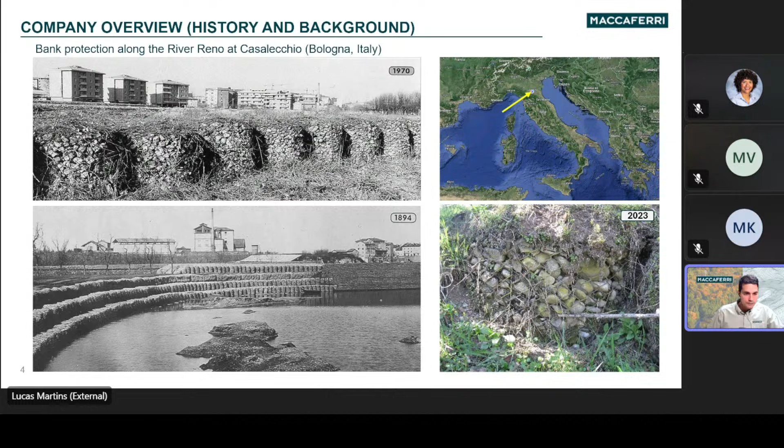First, for those not familiar with Maccaferri, Maccaferri started 130 years ago in Italy by the river Reno with the first ever gabion application. It was a river failure causing major flood, so they built a weir with gabions. Since then, they developed multiple other applications and improved their systems, the biggest improvement being the double twist wire mesh. That's what Maccaferri is known for in gabions, erosion control, and rockfall protection.

The double twist was very revolutionary because by introducing that second twist, it creates redundancy on those connections, so it creates a non-raveling pattern on the mesh. This is still the pattern that Maccaferri uses across all the sectors they apply it in. Maccaferri is present in multiple different sectors like MSE walls, gabion walls, and erosion control, but the focus today will be on rockfall draperies - simple and pin draperies.

This is an introduction to the Macro Design software, a free web-based design software developed by Maccaferri. It includes tools for simple drapery, called Macro 2, and tools for pin drapery, called Macro 1. It allows engineers to evaluate, configure, and optimize rockfall protection systems with standardized methodologies. Again, it's free software available online—you just access the website and use it.

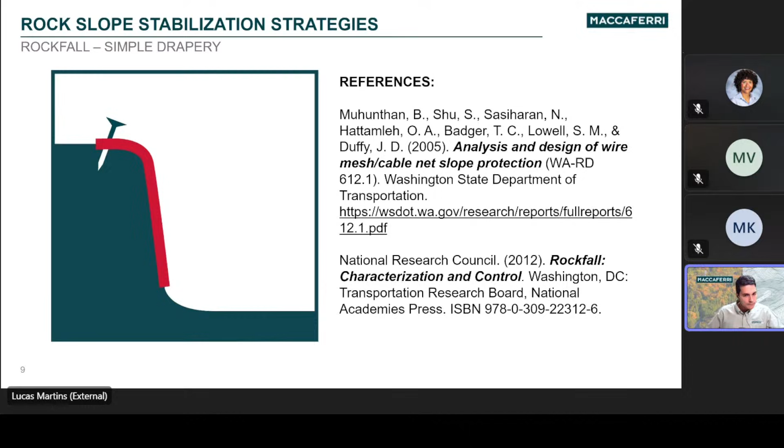First, we have the Analysis and Design of Wire Mesh Cable Net Slope Protection, a paper developed by the Washington State Department of Transportation—a very thorough paper on designing simple draperies. Second, we have the book Rockfall Characterization and Control, which also covers a lot of the simple drapery design.

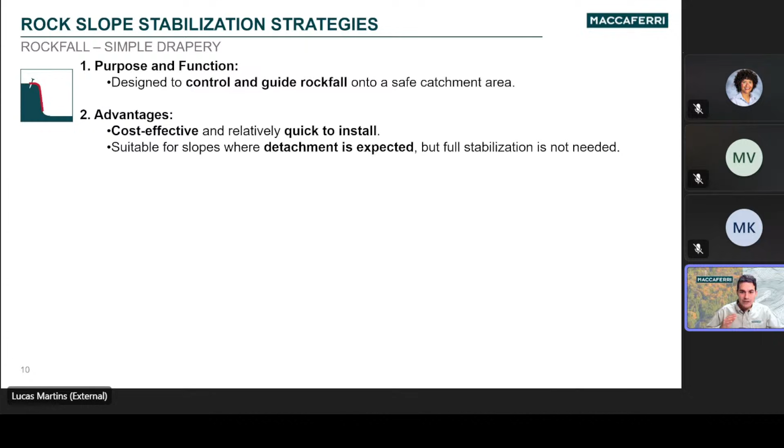So what is it? Simple drapery is designed to control and guide rockfall into a safe catchment area. It doesn't stop the rocks where they detach, it simply manages that fall path. One of the key advantages of this system is that it's cost-effective and relatively quick to install. It is suitable for slopes where we expect rock detachment, but there's no need for full stabilization of the slope—in other words, the slope doesn't require reinforcement, just containment.

From a design standpoint, there are a few key points to keep in mind. First, the drapery must extend above the rock source, so it actually captures the material. The anchor spacing and layout is also critical because besides maintaining the alignment of the mesh, it determines the performance of the drapery. Remember that the mesh carries its load mainly in the longitudinal direction, up and down, which makes the mesh tensile strength one of the most important specifications.

Finally, the mesh unit weight plays a significant role in dampening rock movement. A heavier mesh will push back that rock with a higher load.

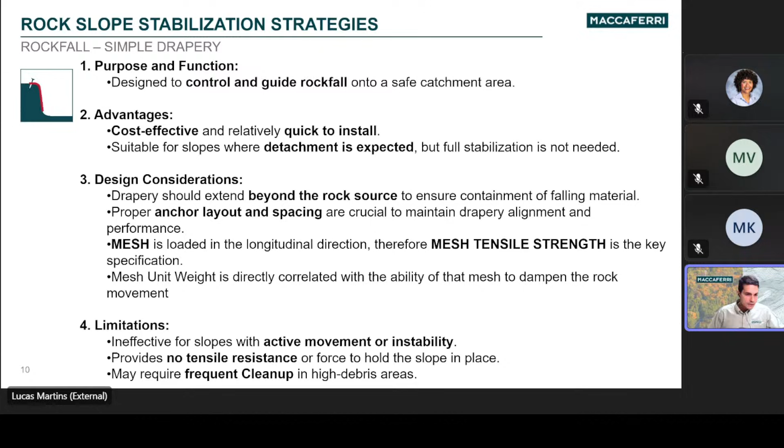There are also limitations to this system. A simple drapery is not suitable for actively moving or unstable slopes. It provides no tensile resistance or structural support on that slope. In areas where a lot of loose material is expected, it may require frequent cleanup to keep the catchment functioning properly. With this introduction in mind, let's move into how the system is modeled.

Here you can see the overall concept. At the crest of the slope, we start with the top anchors, installed at regular spacing. These anchors are responsible for transferring the loads back into the stable rock mass, and securing the top horizontal cable. That top horizontal cable runs along the crest of the slope, or above it, and the cable supports the mesh as it hangs down the face.

Those top anchors can either be intermediate anchors or lateral anchors. As the mesh transfers load into the top cable, the cable redirects those loads as tension into the anchors, following the behavior described by the catenary theorem. For the intermediate anchors, the lateral components of this cable tension cancel out, so these anchors carry significantly lower loads compared to the lateral anchors, which resist the full horizontal pull of the system.

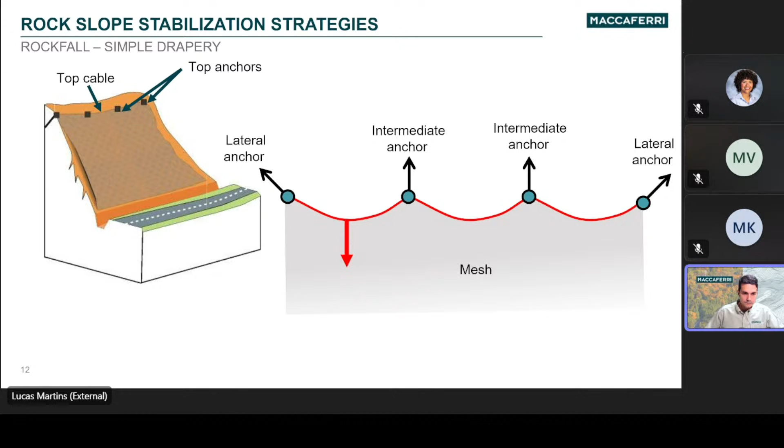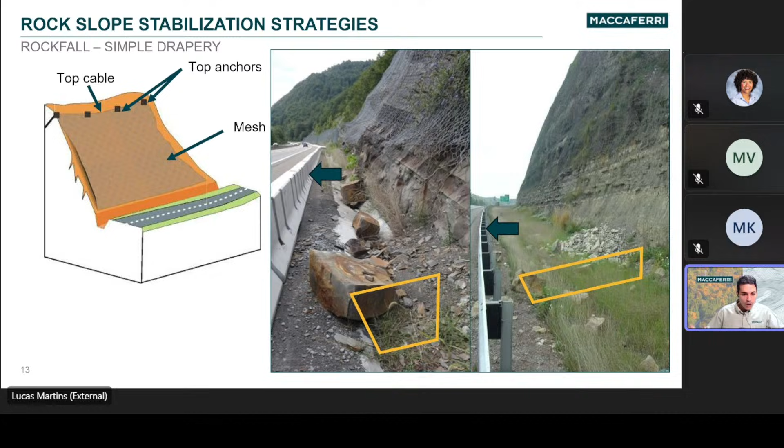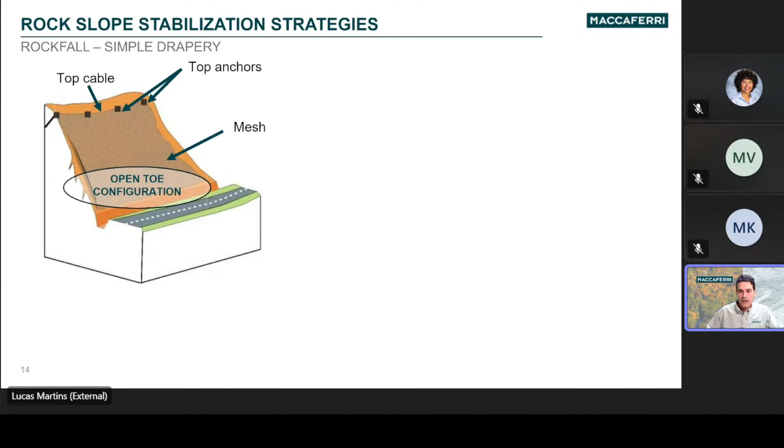As we mentioned, simple draperies require a safe catchment area. This can be a ditch, a rockfall barrier, or an embankment. But what happens in situations, especially when there's no space for a catchment ditch at the toe of the slope? For those situations, we can use something called a closed toe setup, in contrast with the open toe setup.

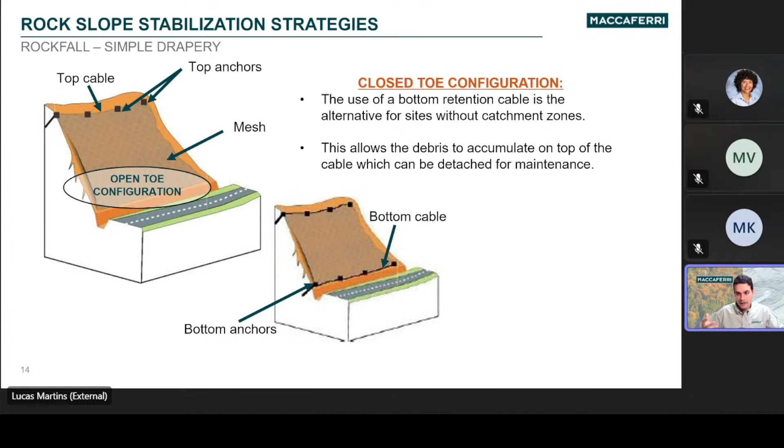Instead of allowing the debris to fall freely and accumulate in a safe area below, a bottom cable is installed and anchored along the base of the mesh. This bottom cable contains the falling material and creates a pocket that traps debris behind the mesh. It is effective for protecting roads or infrastructure directly below the slope, but it comes with a significant trade-off: debris now accumulates at the bottom, and the buildup requires periodic maintenance to avoid overloading the system. Needless to say, in a closed-toe configuration the loads imparted into the system are significantly higher, so you need a more robust structure.

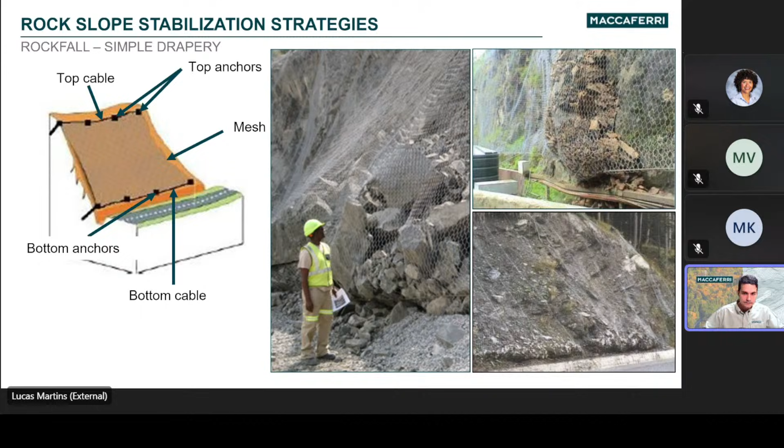When it comes to designing these systems, I've come across many projects, and perhaps you have too, where the design of simple drapery systems is often oversimplified using rules of thumb or empirical standards. It's not hard to see why, because empirical methods are quick, familiar, and have worked reasonably well for years. But that can come at a cost of precision and optimization.

Those empirical approaches often ignore key variables like debris load, slope angle, top cable strain, or snow loading, which can result in either an over or under designed system, costing money or safety in the end. But what's often overlooked is how simple it actually is to perform this basic drapery design. With clear calculation steps, we can go from guesswork to engineering confidence in minutes. My goal today is to show how straightforward and impactful a proper calculation can be for even so-called simple drapery.

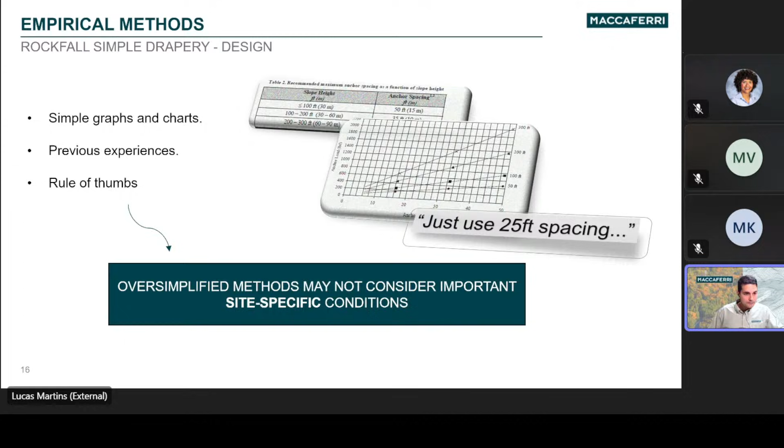Using a basic limit equilibrium model, the system is analyzed by balancing the resisting forces against the driving forces to calculate a safety factor. On the resisting side, we have the tensile strength of the mesh and the resistance of the anchors, both of which oppose the driving loads. For that, we have the weight of the mesh, any accumulated rock or debris within the system, and in some regions, the weight of snow and ice buildup.

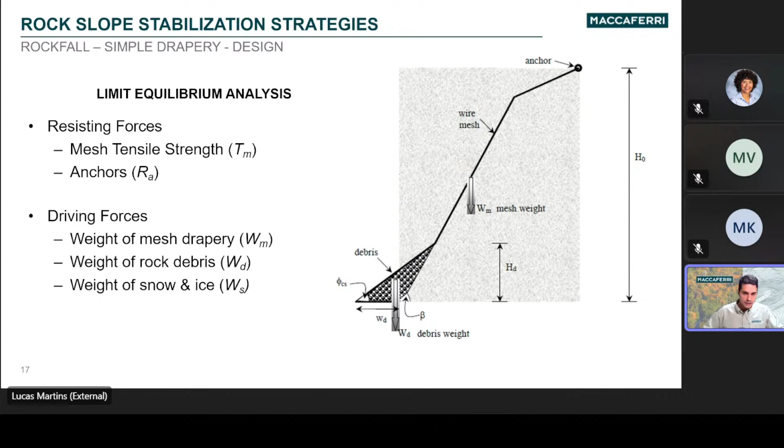So the tensile strength of the mesh - again, it primarily functions along its longitudinal direction, so the tensile capacity is a critical design parameter. The photos and diagrams here show a standardized test setup used to measure the longitudinal tensile strength of the mesh. The mesh is clamped and loaded until failure. For example, our SteelGrid HR30, a commonly used drapery mesh, has a nominal tensile strength of 12,000 pounds per foot, and it breaks at an elongation of about 6%.

This strength value can be directly plugged into the limit equilibrium model, but its elongation is an important design consideration that's usually overlooked. It's overlooked because the model assumes that under load, the top horizontal is uniformly loaded and the wire mesh is uniformly tensioned. But in reality, the mesh undergoes non-uniform deformation as it adapts to the slope geometry and transfers the load. Rather than transferring the load evenly, a mesh with large elongation will create pockets of concentrated tensile force, which can be especially damaging when debris accumulates at the bottom.

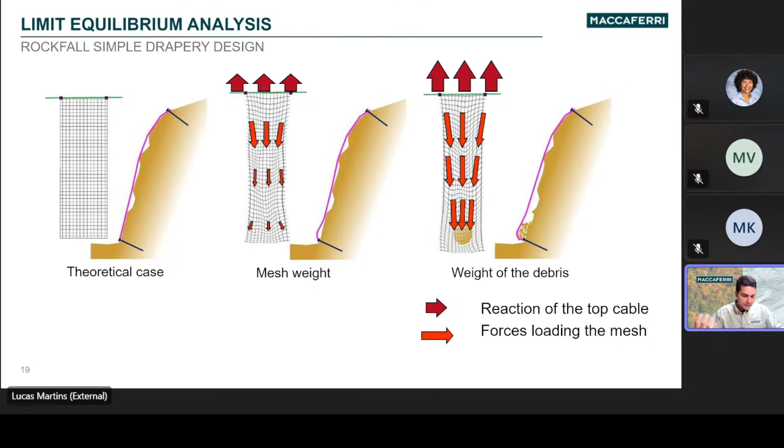This effect is addressed in the FHWA guidelines, which suggest that introducing vertical high-strength steel cables into these systems, either woven into the mesh or connected to it, will help control deformation under load and allow the system to mobilize the full tensile strength capacity of the mesh.

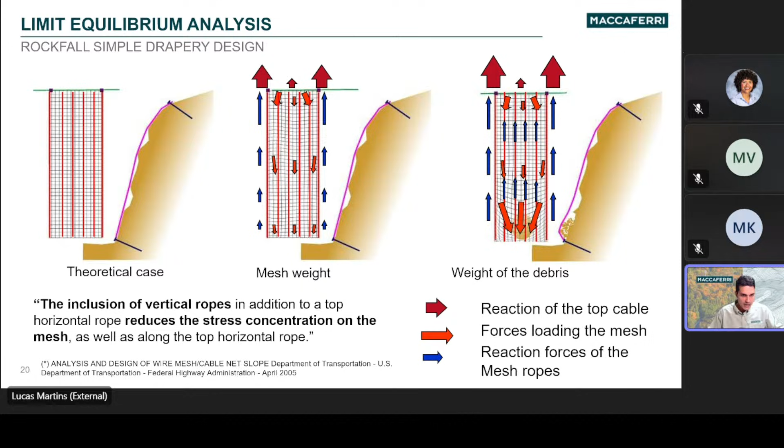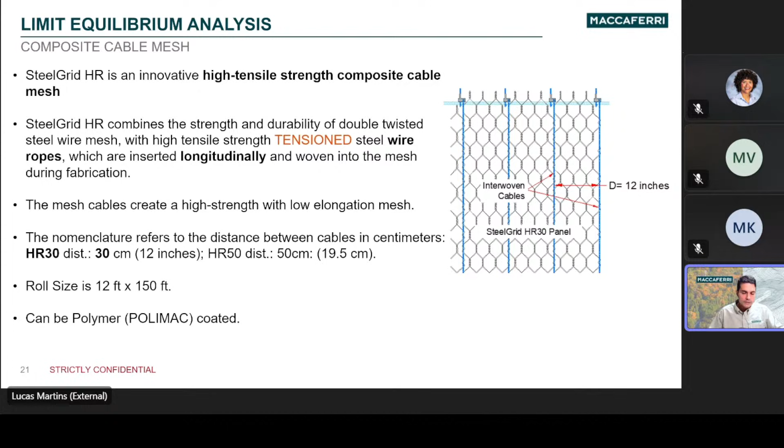And here is where I present the SteelGrid HR. SteelGrid HR is a composite cable mesh, meaning you're introducing tensioned cables into a wire mesh matrix. The cables create a high strength, low elongation mesh. The nomenclature refers to the distance between those cables in centimeters. So a SteelGrid HR30 has a spacing of 12 inches, and a SteelGrid HR50 has 50 centimeters. The closer together those cables are, the higher the strength of the mesh.

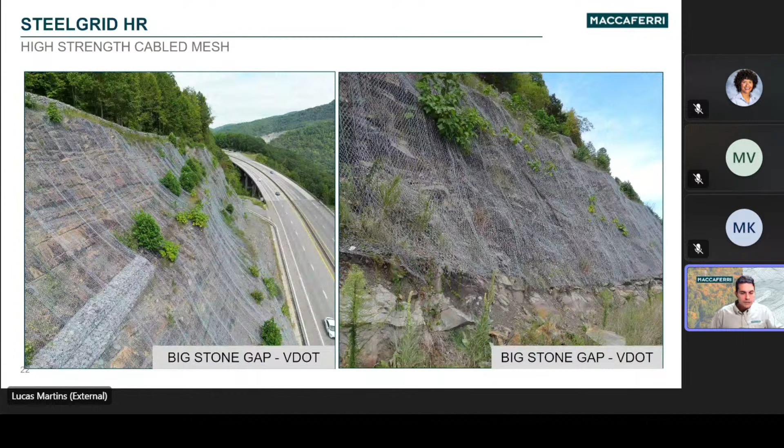Here are some photos of the SteelGrid HR on some projects. Here is Big Stone Gap with Virginia DOT. Here is Waltham High School in Waltham, Massachusetts. And an I-80 job in New Jersey.

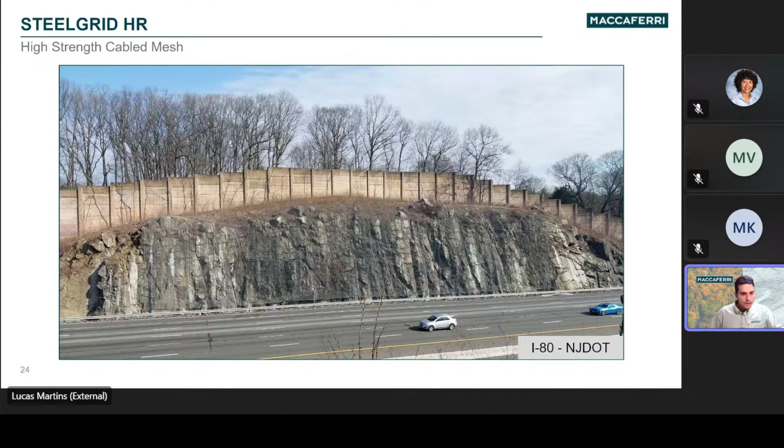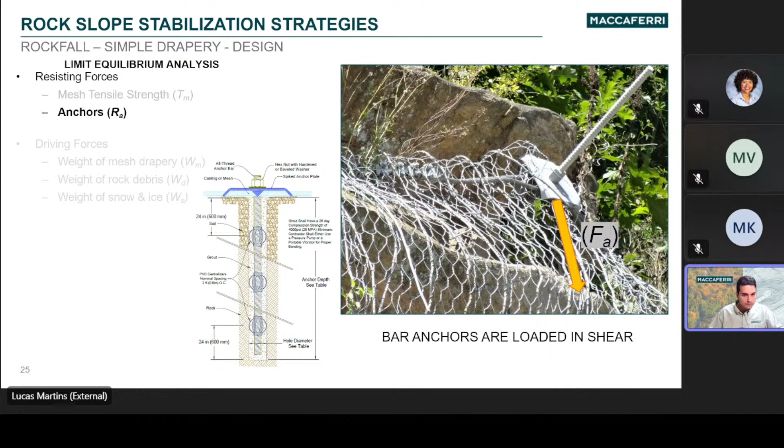The next resisting element on the drapery system is the anchors. While the mesh carries its load longitudinally, the anchors are what ultimately connect the entire system back into the stable slope. In a simple drapery, the anchors are typically one of two types: solid steel bars, like the one in the photo, which resist load primarily in shear, or flexible cable anchors, which are loaded in tension. From a design standpoint, there's no technical performance difference between the two - both adequately transfer the load. In most projects, the choice simply comes down to contractor preference.

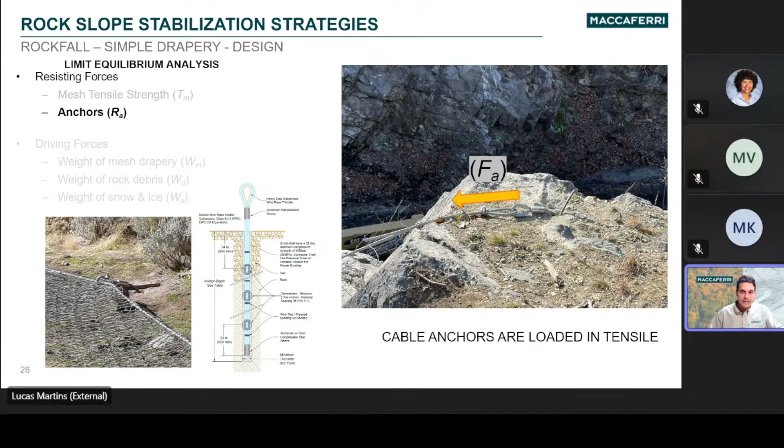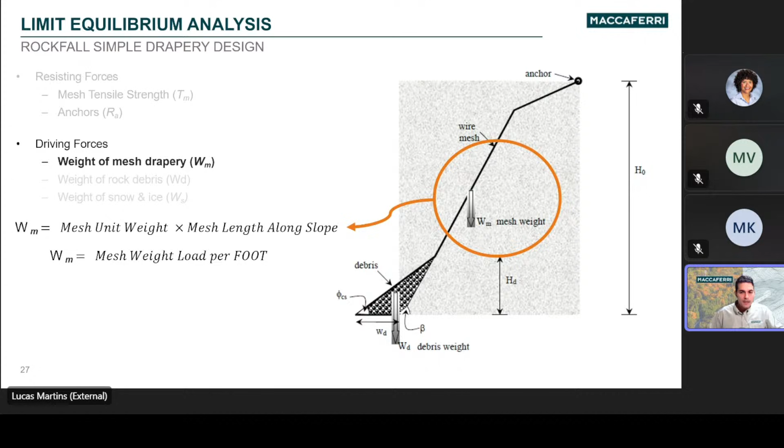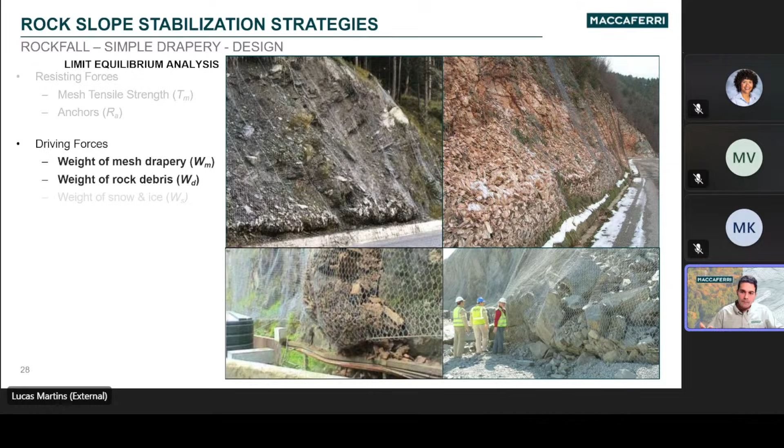Next, the next major driving force is the weight of the rocks and debris. As material accumulates behind the mesh, its weight adds a vertical load to the system. Those images show how significant that buildup can be, from fine fragments to large boulders, and it directly increases the demand on both the cabled mesh and anchors. To estimate this debris load per foot, we calculate the volume of accumulated rock behind the mesh and distribute that over an anchor spacing.

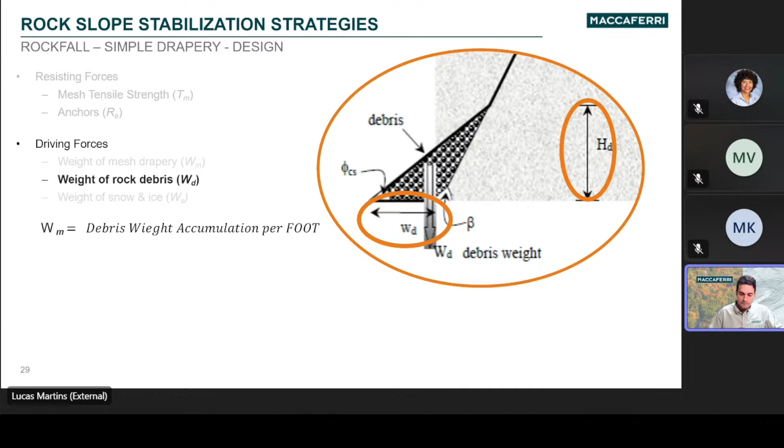This gives us the debris load acting along the slope, which can also be dimensioned as a height and width of debris. A different approach, and one that's a little more clear, is whenever you have a number of boulders or rocks that you want to allow to accumulate between an anchor spacing. You can divide that volume of rocks by the anchor spacing, and then you'd have a load per meter or per foot.

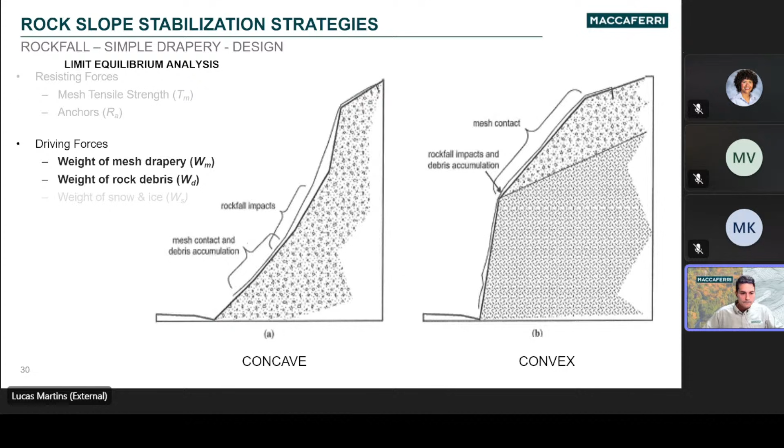In colder climates, snow and ice can add significant load to drapery systems. Snow typically accumulates on slopes shallower than 65 degrees, but ice, as you can see in the image, can form and bond in much steeper spaces. When it builds up behind the mesh, it contributes to that vertical load just like debris.

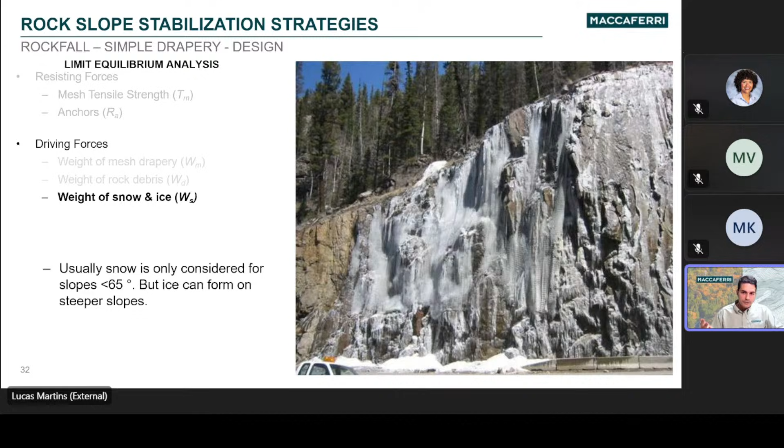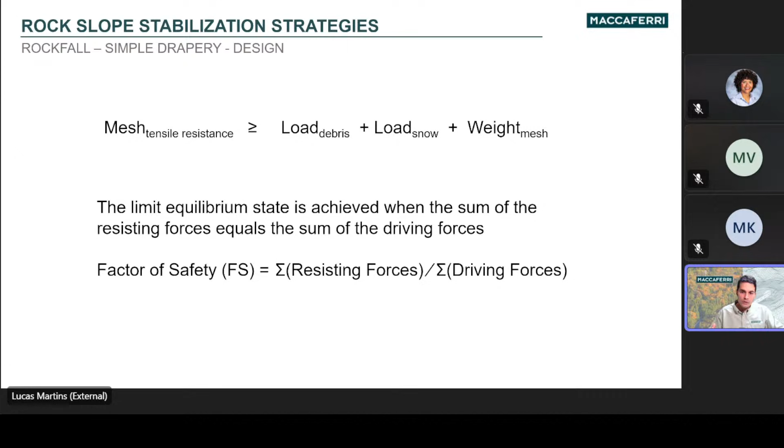When that equilibrium is set, now we identify the resisting forces that we need to account for those loads. Once those loads are determined, the results will guide us through three key safety checks.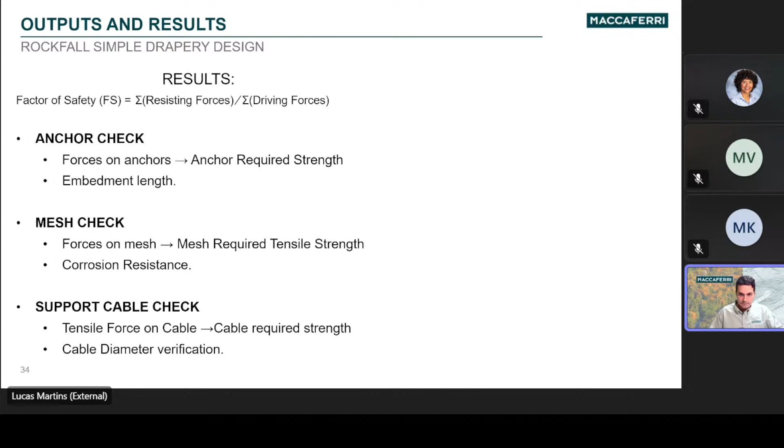First, we've got to verify the anchors. Are they strong enough to resist the shear or tensile forces? And is their embedment adequate for resisting the pull-out?

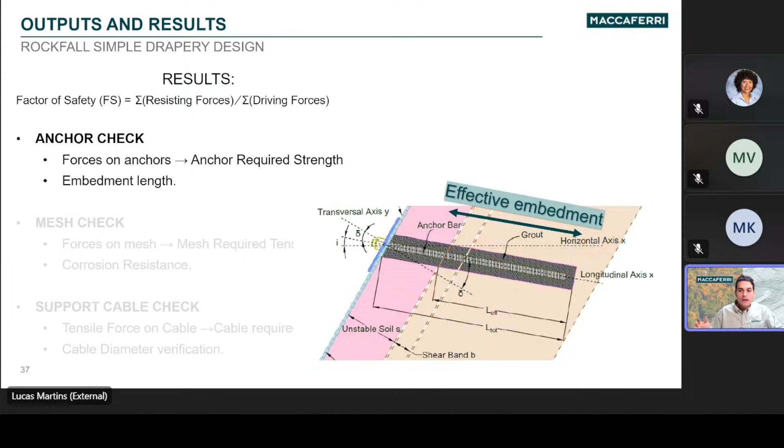Then we check the mesh. Does the mesh have enough tensile strength to resist that load?

But beyond the strength, durability is also a critical design input for the mesh, for our long-term performance, especially in aggressive environments like roadside and marine settings.

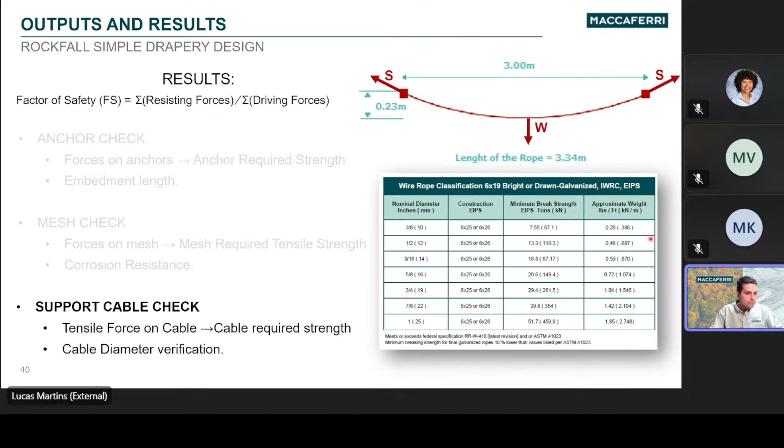And this kind of ends our design here. So even for simple draperies, precision does matter and site conditions will vary. So we should take this design and use a tool like MacRO to do this design.

I'm going to go ahead and run a live calculation here just to show how simple that is. So if you go in and type in edesign.maccaferri.com, you're going to have access to all of our design softwares. This is a web page where you can register and have access to them. On the bottom here you would see the MacSNail, the soil nail design that we presented last, and here is the drapery design that we're going to go over.

As we enter the application, we would create a new project. For example, I have some saved here, but this would be the simple drapery one. You can create a project number, owner, design firm.

For the country, you would probably want to select United States or Canada, whatever you're based out of. You can also enter the location of your project. Here I want to enter the location of our headquarters, which is in Hagerstown, Maryland. All of our materials meet Buy American requirements and are fabricated in the U.S., so just pointing that out here.

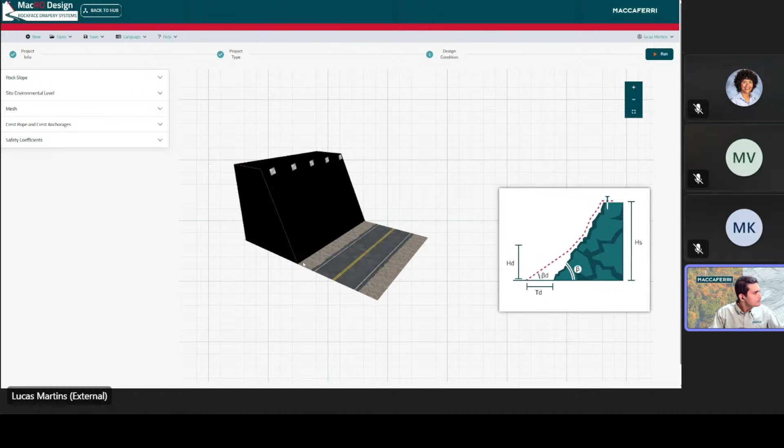So this is the software itself. On the top you have some options like saving the file to your computer, and here you have your account name. Under help, very important, you have the user guides - the user and reference guide. The user guide goes through the inputs, and the reference guide goes through the background design. So those can be easily accessible through here.

So let's go ahead and start doing our rock slope. I have here my cheat sheet. So let's start with the slope that's 75 degrees.

and about 80 feet high. We are going to consider a material accumulation of 4 feet by 4 feet. That means the debris accumulation is going to have those dimensions. I'm going to show a little trick later on how to verify if this is appropriate or not.

For the friction angle, the debris friction angle should be entered as about 80% of the residual rock friction angle, and the debris unit weight would also be 75% of the intact rock unit weight. For this, I'm going to leave 125 PCF and 25 degrees.

Now here we have a parameter that's a little trickier: friction angle between mesh and slope. This friction angle has to do with the undulation and asperity of your slope against the mesh. This input is more sensitive in applications where you have snow weight on top of that mesh that creates a bigger friction load. This comes straight out of the Washington guidelines.

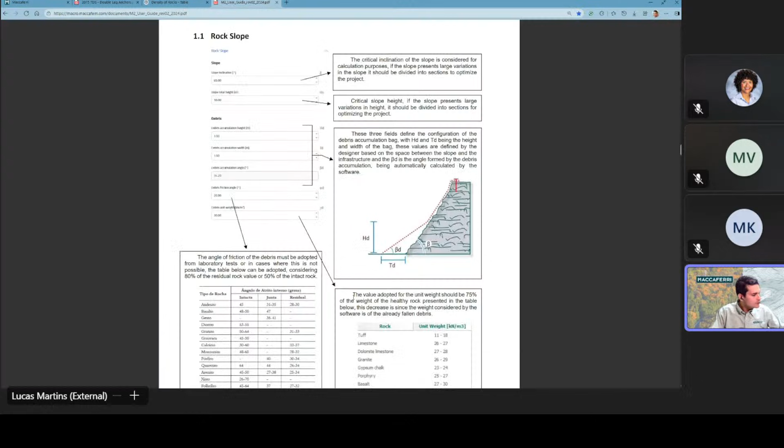And if we go down here, you see that you have a few photos guiding you. So you would use an angle between 18 and 35 for a flat slope, 36 and 59 for a wavy slope, and above 60 for a very rough slope.

If you want to dive a little bit deeper into this, you can go into the WashDOT guidelines and they explain it a little longer. But for sake of time, let's go here and enter a flat slope, so very little resistance against that slope.

Here's where you'd consider snow accumulation if you want a snow or ice thickness on top of your mesh. For the site environmental level, this is a European norm, but it kind of gives you an idea. For different sites and different environmental levels, you have different corrosion requirements. Here on extremely aggressive, you'd only be considering something with a polymer coating.

For the mesh itself, we have multiple options that Maccaferri offers. We always recommend getting in contact with us to see what is available in the North American market. But as we mentioned, Steel Grid HR is the mesh with cables in one direction, and the number would be the distance between those cables. And here you have the double twist, which will be the wire mesh without cables. So let's go with a PMC coated Steel Grid HR50.

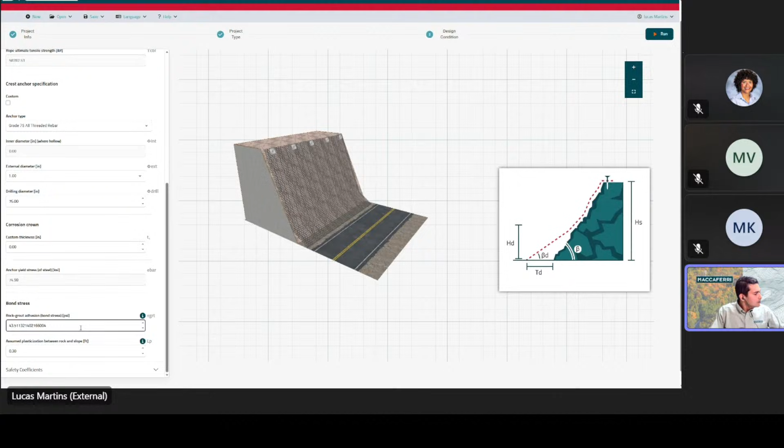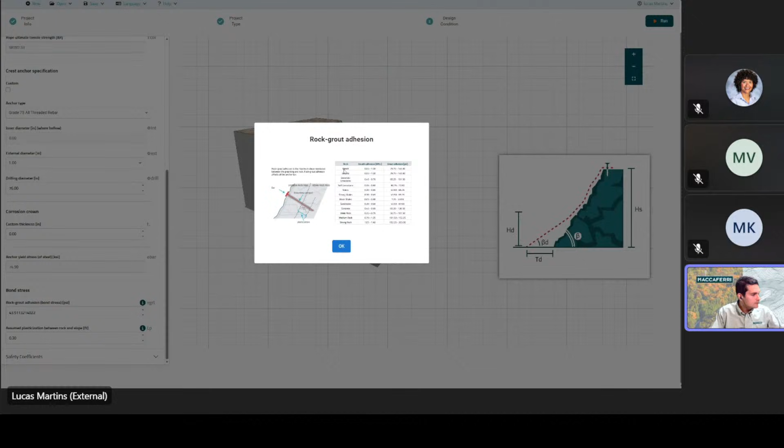Now the bond strength. The bond strength is a value that can come from a site test or from the literature. If you click on the little i, it gives you a cheat sheet here for some bond strength, grout adhesion, bond strength for certain types of rock. Let's enter the granite and basalt one.

Plasticization: this is also something that has to do with the site. It is the shear band size. Here are some plasticization values that you could use, but let's leave it at about 10 centimeters.

And then you enter your safety coefficients. Those would modify the loads or the resisting factors. So here you have a safety coefficient of 1.5 on those variable debris loads. If you click here, you're going to have some codes, European codes.

Safety coefficients on the permanent loads, that would be the mesh weight. Here you have a safety reduction on the mesh resistance. This will reduce the mesh tensile resistance. It is 2.5 in order to consider the differences between a real life scenario and the test, as you saw, the clamping, the simple test.

You have the geometry of the top longitudinal cable. This is a safety reduction for slopes where you have a very undulated crest and you can't guarantee that your anchor spacing is going to be the 10-foot, for example, on this one that we entered. So it would be 1 for regular slopes, and then 1.1 for irregular slopes.

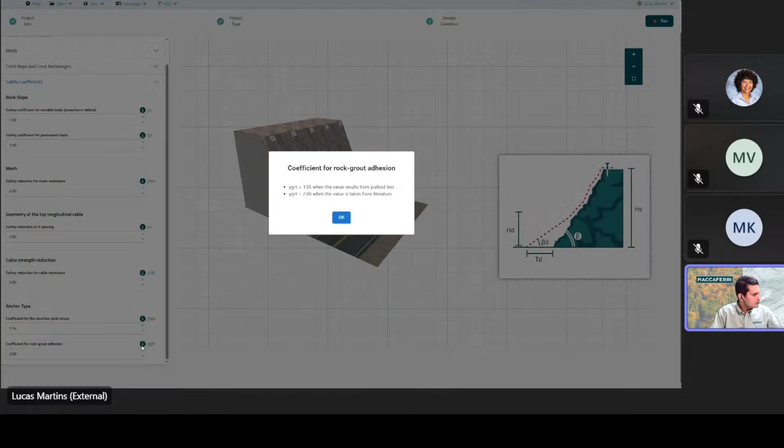Here you have a strength reduction on your cable, a reduction on your bar yield stress, and a reduction on that grout bond strength. All of those, if you click on the little i, there's information.

Let's go ahead and run and show you how it looks. Once you run, you're going to have those 4 checks that I covered: the mesh check, the top cable check, and the anchorage check, the intermediate one, and the lateral anchorage check.

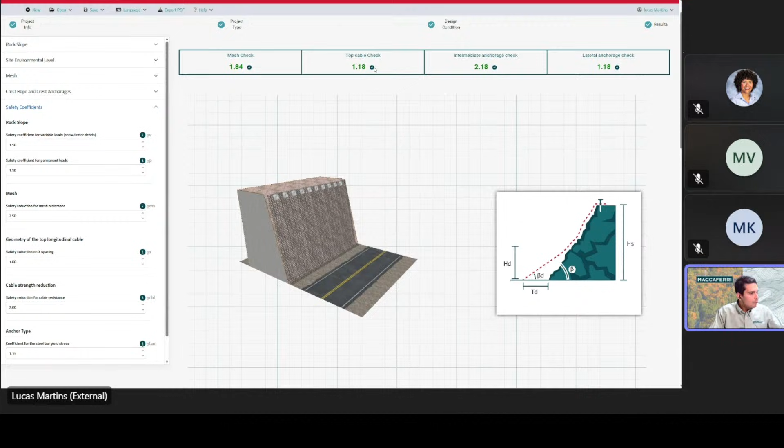Because we entered the safety factors beforehand, we're shooting for above 1 safety factor on the end. If you scroll down, you're going to have all of the calculations cleared out here for you.

First, you'd have that design load. You have the total stress, the admissible tensile resistance of the mesh, the debris load, snow load, mesh total load. You have your cable design with the maximum force on the cable, the maximum working load of the cable, maximum sag between those 2 anchors. You have your anchorage calculation.

And I want to point out a few things. So you saw that we did the design with a thread bar anchor, but I mentioned you can use cable anchors as well. So if I have a thread bar anchor design and I want to use a cable anchor, the tensile resistance of your cable anchor has to match the shear resistance of your bar. So that's what is showing here.

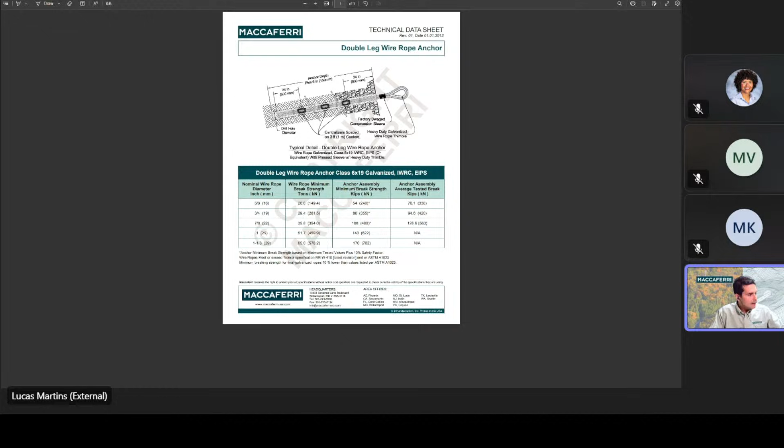Minimum required tensile strength of cable anchors, 25 kips. That's the same as the maximum force of lateral anchors. So the maximum force of lateral anchors has to match the tensile resistance of your cable anchors. So if you want to pick a cable anchor, you can go to a technical data sheet like this one and pick the diameter of your cable anchors. For example, a 5/8 inch cable anchor has a minimum break strength of 54 kips. So that would be appropriate for a 24 kip load.

Here, the same for the intermediate anchor design. You have that force here for the intermediate anchor.

Now, I said that there was a trick that I was going to show with the debris load, and this is the trick here. So you see here that you have the debris load equal to 1,292, so about 1,300 pounds per foot. And our anchor spacing is 10 foot. So if you multiply that debris load by your anchor spacing, it means that you're accounting for about 13,000 pounds of rock between your anchor spacing.

Now, if you consider that a 2-foot diameter rock weighs about 720 pounds, that means that you're accounting for a certain number of boulders. So this is an easy check to see if your debris load is appropriate or not. I know that using height and width is not the clearest, but that's how the methodology describes it, but that's the trick that I use.

So yeah, this is the design. You can export a PDF with your design. As you open it, you're going to see there's a very pretty looking report here with all of those parameters.

So that kind of concludes us on our simple drapery design. As you can see, it was a very fast design, very fast calculations. You can optimize that system very well, choosing the correct cable diameter, the correct anchor spacing, the correct mesh to adequately take into consideration all your site conditions.

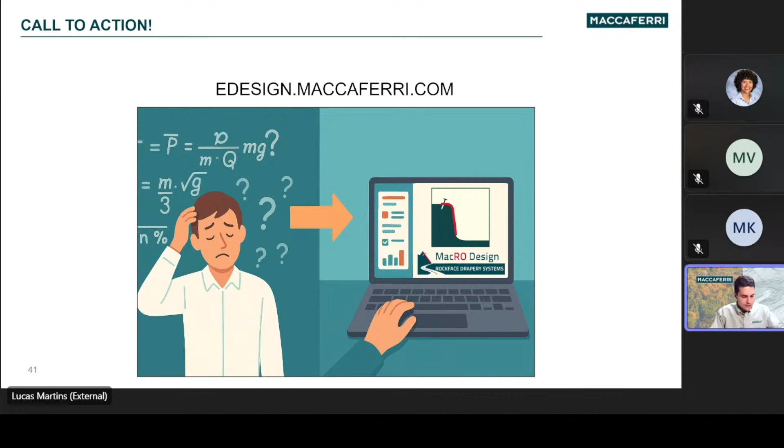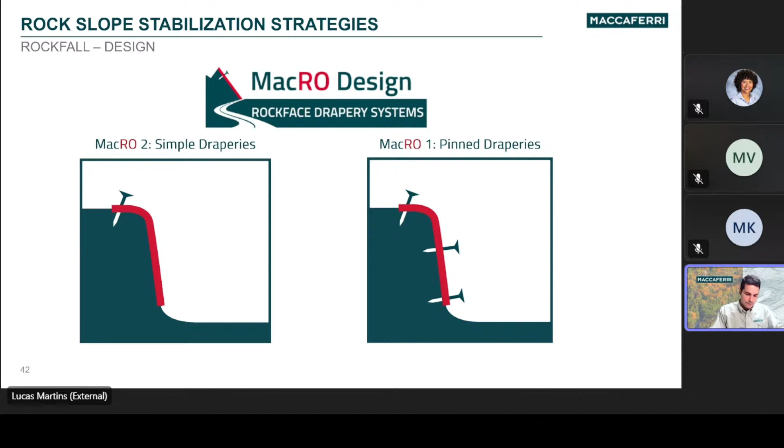So now that we covered the MacRO 2 for simple draperies, let's jump into the MacRO 1 for pinned draperies. Although very similar in name and involving the same elements of a simple drapery—it has mesh, anchors, cable—the goal and the design of pin draperies is very much different.

For this module, we design based on those methodologies. Again, for those who want to dive deeper into the design of those systems, those are some papers that I recommend. Here you have a paper from 1988 on hexagonal wire mesh for rockfall and slope stabilization. Very good paper for the beginnings of rockfall draperies.

Next, we have the deformability of the rocks and the rock joints. So this is going to come into play on the pin drapery. We're going to cover that.

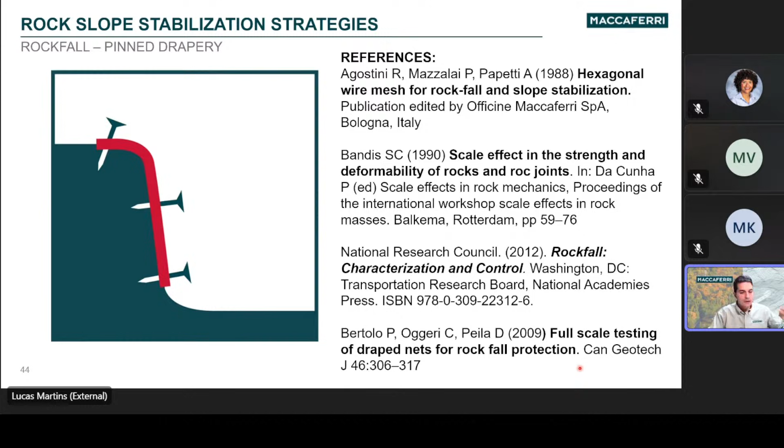Next, we have that Rockfall book that I already mentioned, the TRB book. Covers everything about rockfall. And last but not least, if you have time to see one of those papers, this is a paper that you've got to see. It's a very in-depth analysis of multiple different drapery nets and cable nets on a pin drapery scenario. They even have a full-scale test on a pin drapery, which is very, very interesting to see.

So the pin drapery is designed to stabilize and retain the rockfall or the loose superficial rock, and it uses a regular pattern of fully grouted passive anchors that pull the mesh tight against the slope, improving that near-surface stability and reducing the likelihood of block detachment.

One of the main advantages of the system is that it requires minimum to no maintenance once installed. And unlike the simple drapery, it doesn't require a catchment area. So it's suitable for locations where the space is limited and where debris must be prevented from detaching altogether.

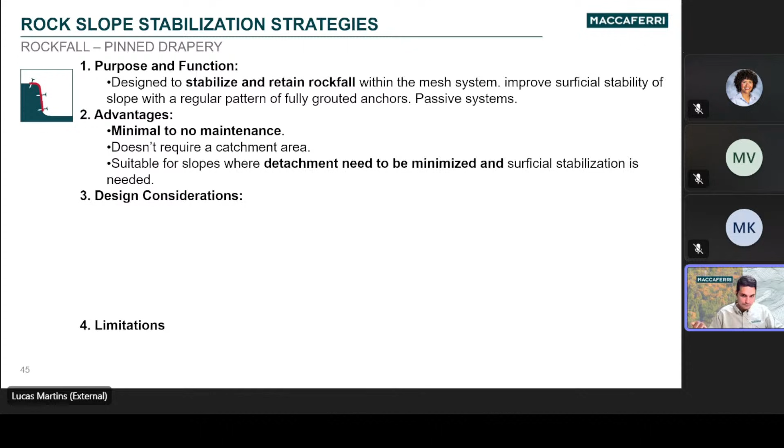From a design perspective, the mesh still has to extend above the source zone, and the anchor spacing and layout here is critical to ensure the conformity of the mesh to the slope.

In this type of system, the mesh now is loaded in an out-of-plane direction. So the mesh punch strength is the key mesh specification. The stiffness is a concept we will cover, and it is essential to the performance of those meshes and their ability to contain that rock movement.

Now it sounds too good to be true. What are the limitations? Again, with all good solutions, it is cost intensive. Installation on those types of systems - the price for installation is directly correlated to the amount of anchor drillings you have to do. Drilling is the driving cost. In a pin drapery, you have more drilling than a simple drapery, so it will be more cost intensive.

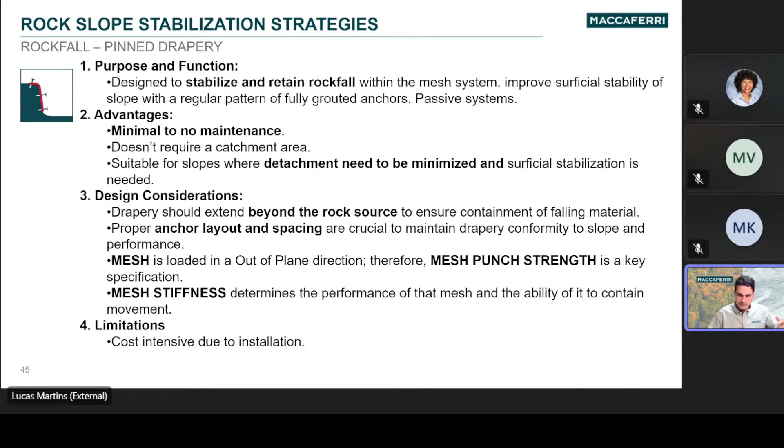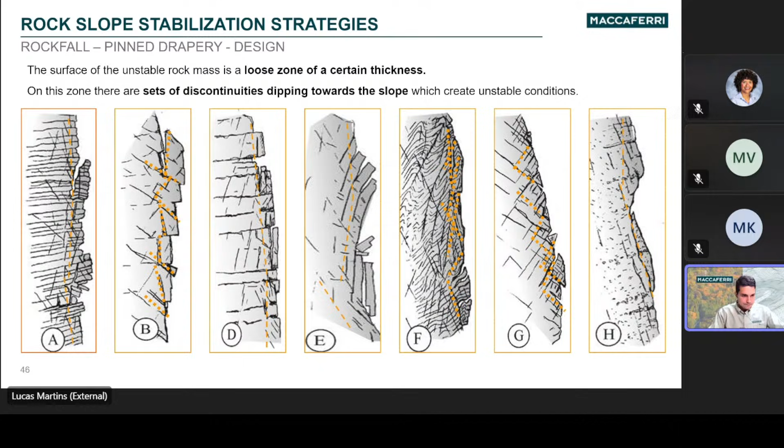To start the design, we first need to identify the superficial unstable portion of that rock mass. This portion can be identified as joints, weakened rock pockets, or boulders fit against each other. Once you identify that unstable rock mass, it's easy to identify the slope inclination and the thickness of that rock mass, which is parallel to the slope.

We also need to identify the inclination of the joints that are dipping in an unfavorable way, which here we have as the most unfavorable joint and the angle alpha. That is the sliding joint, or sliding plane, for that rock mass.

The driving force here has to overcome that dilatancy of the joint. So basically you have the joint resisting that movement. In this stage we call it a peak resistance. But when that maximum opening of the joint is reached, the rupture and the asperity starts and the sliding movement gets faster. So then we have what we call the residual resistance.

As you can see, those are rock mass characteristics - joints, discontinuities. It's different than the presentation we did earlier this month on soil conditions, which would use a cohesion or soil friction angle. So we are characterizing the failure here with discontinuities, an amount of mass that the anchor has to resist, and a sliding joint where that mass slides.

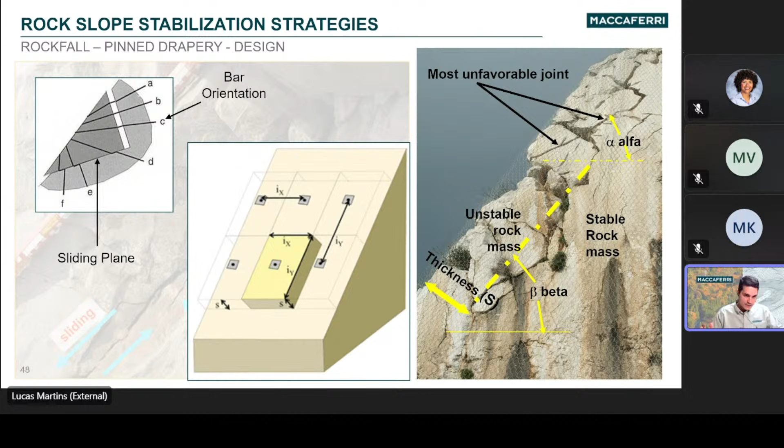So the anchors here play the leading role in providing the stabilization of the rock mass. But the mesh provides that superficial stabilization by resisting movement and keeping the rock from detaching between those anchors. Stabilization is offered through passive resistance, meaning the mesh strength is only mobilized after deformation, attributed to loading, happens from the loose rock to the mesh. So the mesh will only push back on the rock if the rock pushes onto it.

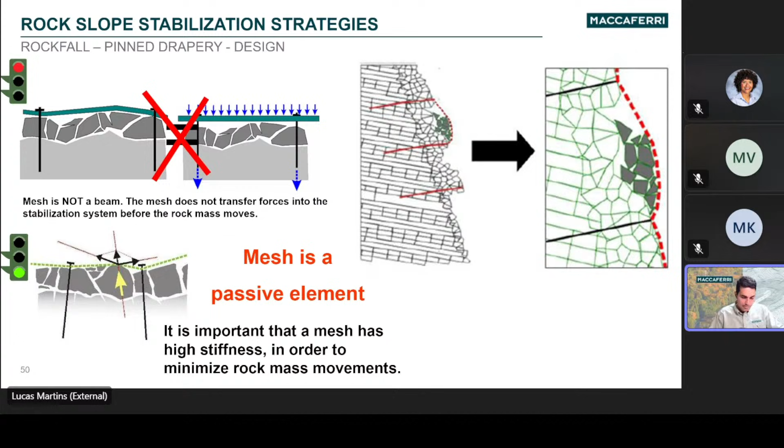Therefore, it becomes clear that it's very important that the steel wire mesh facing is able to mobilize its high strength at low elongations to provide stabilization to those loose rock surfaces. So the performance of the mesh is determined by its stiffness, or the mobilization of its punch strength under load. I say that because different materials have different behaviors under the same applied punch load.

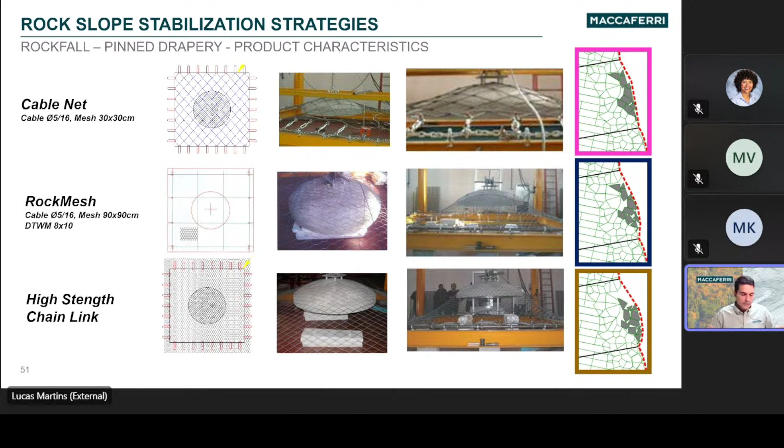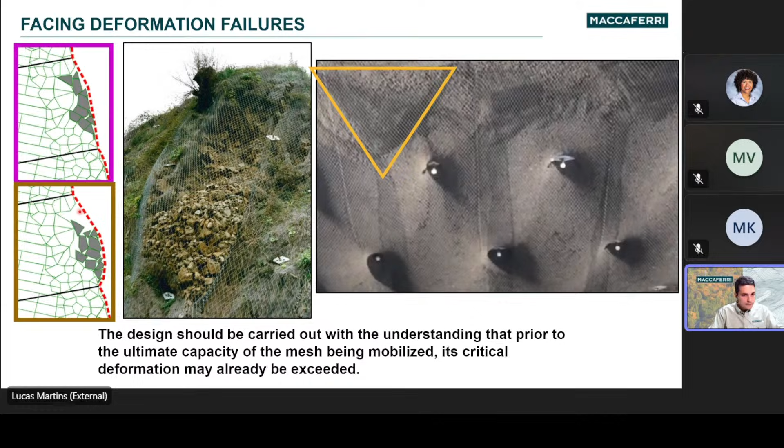You had a washout on this top anchor and an overloading on this bottom anchor. That's because the mesh allowed for a certain amount of deformation where it created a void that has to be filled with material from above. We call that a serviceability failure. So anchors play the leading role in superficial stabilization, while the mesh holds back the blocks between those anchors.

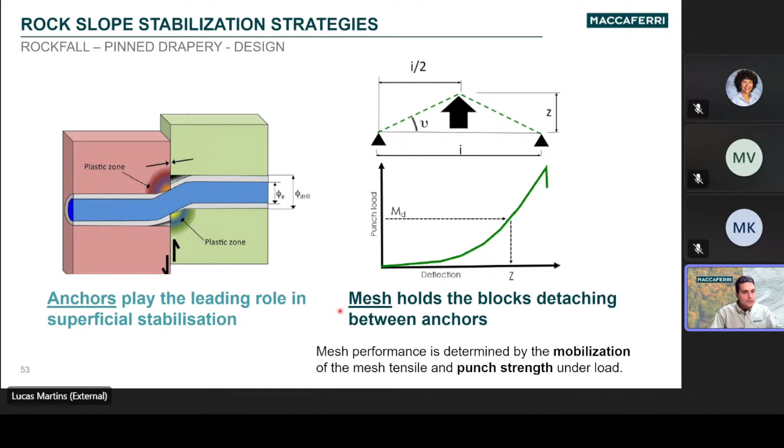That brings us to our cable net, or composite cable net. The system incorporates a net or grid of pre-tensioned high-strength steel cables that provides very high strength, with peak strength mobilized under very low elongation. Those cables are inserted into the mesh under tension, so as soon as you tug on them, they're going to tug back.

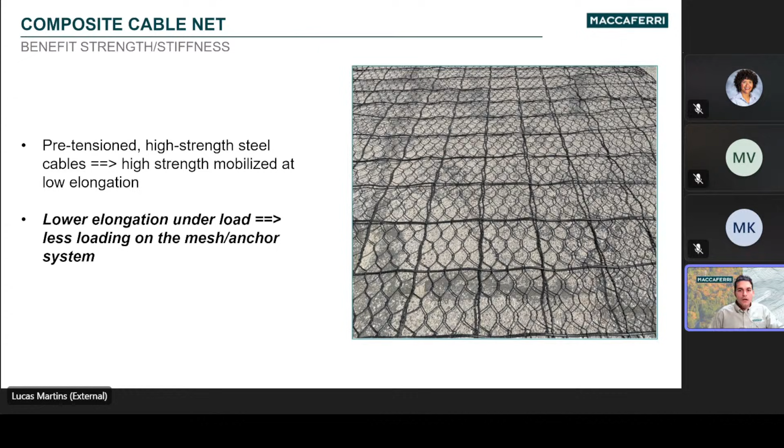For the most demanding pin drapery applications, Maccaferri offers the MacArmour, commonly known as RockMesh, line of products, which have two cables interwoven into the mesh into a one-layer system. The cables run in both directions, longitudinal and lateral, which provides the greatest punch and puncturing resistance available in the industry. For example, the RockMesh 3030 or MacArmour 30x30 has cables on a grid pattern of 1 foot by 1 foot, or 30 centimeters by 30 centimeters.

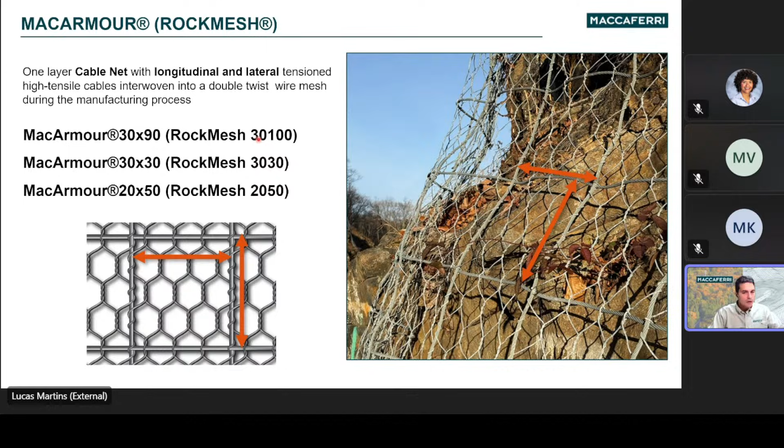So a quick trick here for the Maccaferri product: if you see two numbers, it's probably a biaxial grid. If you see one number, it's probably a uniaxial grid, like the steel grid.

So this was quicker than the simple drapery, but it's basically you're trying to prevent a rock mass from moving. So you characterize your rock mass, the size of your rock mass, and you're creating a netting that will prevent that. As we jump into the software, we're going to see how that is done.

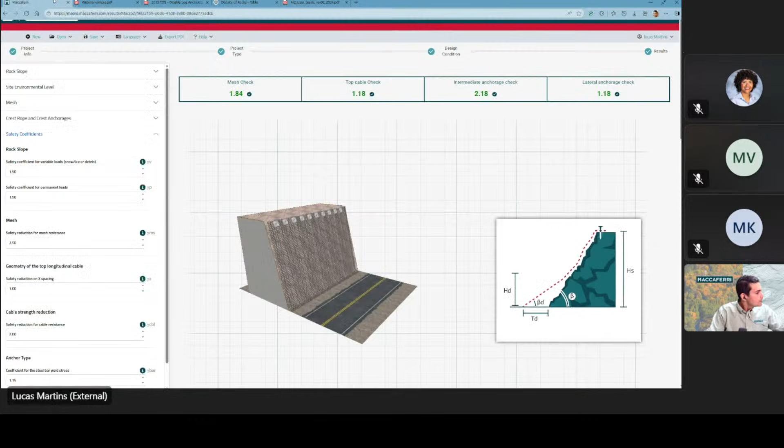Okay, so coming back to the software, we were here at the Simple Drapery module. Let's go back to the hub and add a new project. So this is going to be our pin drapery.

Let's go ahead and add the US. That's the location, go ahead and enter the same one. 0.22. Now here, as we select, we have to select the module Macro 1 for reinforced systems and choose our imperial system.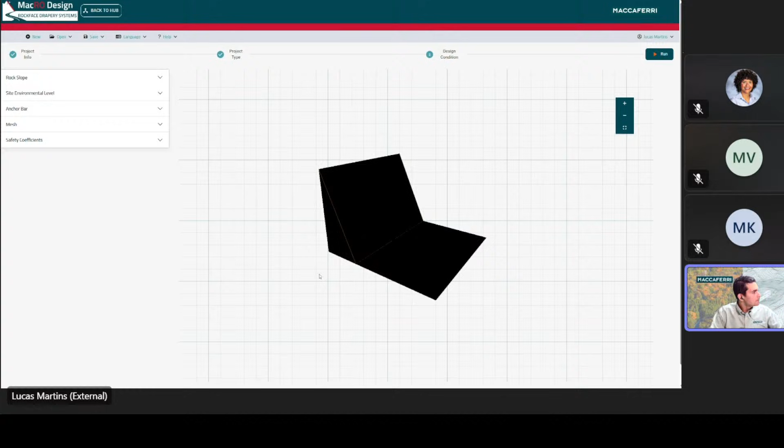So first you have the characterization of that rock slope. Here you have the inclination of the slope, so let's enter a steep slope. Here you have that parameter, thickness of the surficial instability.

This is that area where your slope becomes not unstable boulders or rocks, but more stable. This is a key parameter, and probably the hardest one to come up with. After you do your borings, that's going to be a little easier. Here you enter the density of your rock, and you can also click here for different unit weights.

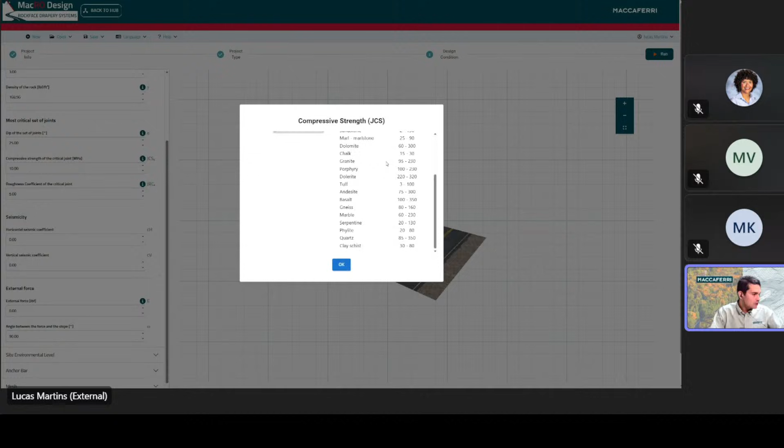Here you have that joint, the dip, compressive strength, and roughness characteristics of that joint. Most of the time the information is not present - we would love for it to be present. If you want to enter parameters, you can click here to consider general compressive strength for joints in different types of rocks, or you can leave it at 10 as the minimum parameter for that strength.

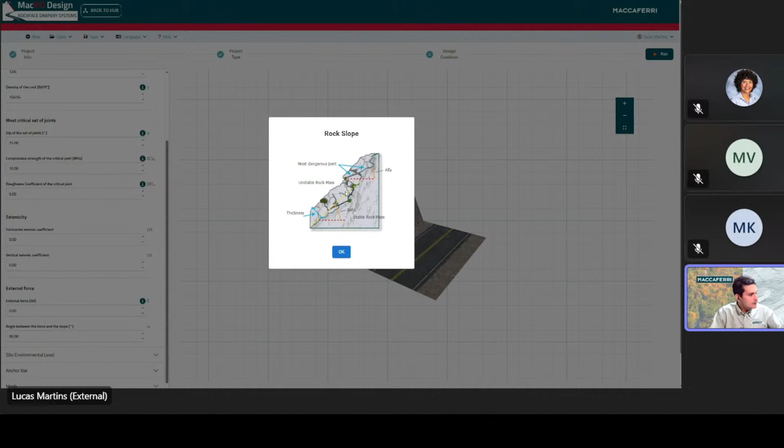Dip is also a parameter that we would love to have, but it's not always present. You can leave it at 25, or 25 to 45 for the most conservative calculations.

For this system, since it provides stability to the slope, you want to enter your seismic coefficients. For external forces, if you want to account for ice buildup or snow buildup, you can do that - it would create a shear force on the nails or anchors. Again, for that environmental level, for the corrosion protection.

Now you have the characteristics of your anchor bar. It's very similar to the simple drapery, but now you have horizontal and vertical spacings. So let's go ahead and try with a 10-foot by 10-foot pattern.

Here you have the inclination of your bar to the horizontal. Again, I showed that the bar, depending on the inclination, can act in shear or it can act in tensile. So here you want to always shoot for a tensile resistance.

You can enter some kind of coefficient to increase the anchor drilling diameter, or leave it at 1 for no increment. For the anchor type, again we usually use threaded bar - it can be hollow bar or steel bar. If you want to use a hollow bar, you can enter it as custom. But let's go ahead and enter a grade 75, number 8 bar with a drilling diameter of 3 inches.

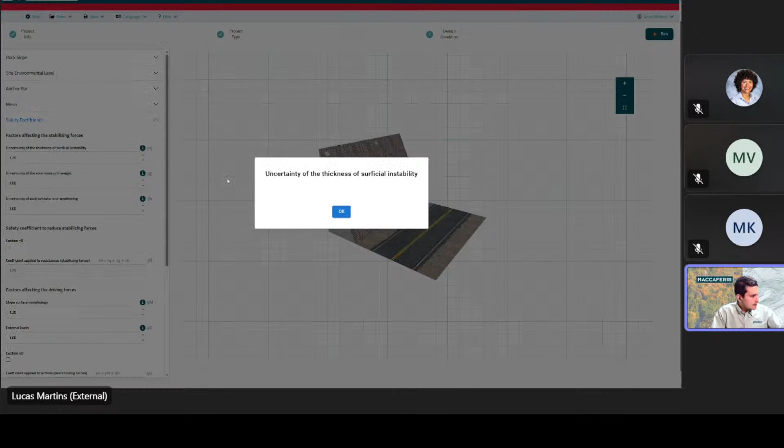Here you have the uncertainty of the thickness, so I said the thickness is hard to guess. This is where you would enter a safety factor to keep you safe there, so you have a geomechanical survey or a rough or visual estimation. For the uncertainty of the rock mass weight, you have homogeneous slopes or non-homogeneous slopes, so you can enter that here. Uncertainty of the rock behavior and weathering - for compact rocks or weathering rocks, you have different parameters.

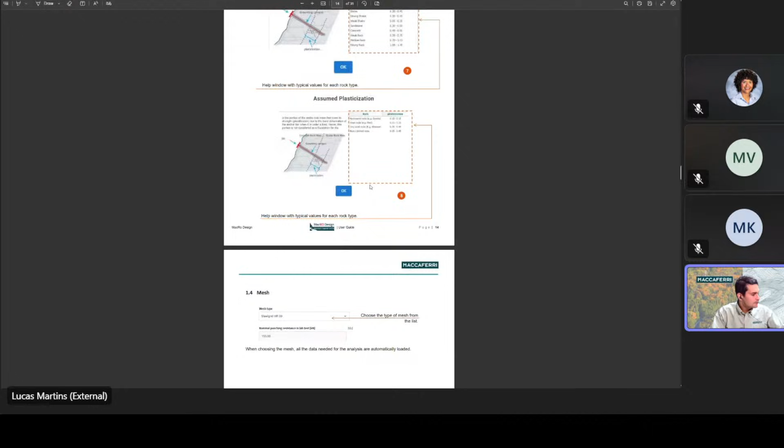If you have a question, what value should I enter here? If you go on the user guide and open it, there is going to be the parameters for the safety factors at the end, and it goes through all of the different parameters here. It plays between 1.2, 1.3, 1 and 1.5, and 1 and 1.5. So very easy here to access.

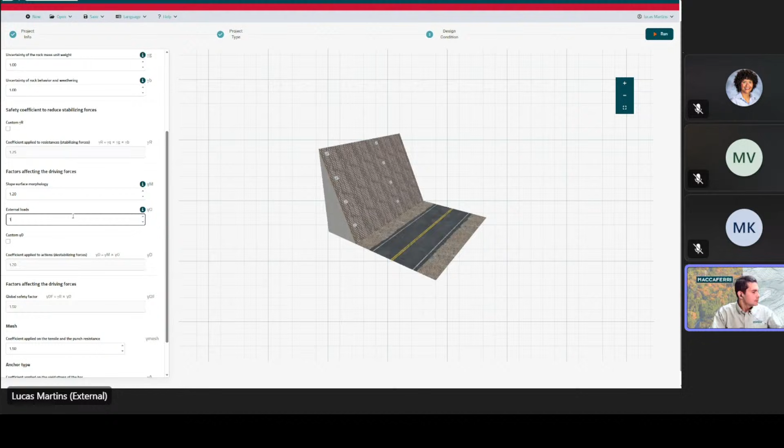Now we have our safety factors affecting the driving forces, the slope surface morphology, some external loads. Here is the coefficient applied to the tensile and punching resistance of that mesh. You have the coefficients reducing the strength of your bar and the coefficients on that bond strength.

As we run the design, there's two checks. You're going to have the check of the sliding zone - this is more of an anchor check. So you have your anchor working ratio, which is how much of the anchor is being utilized based on its maximum strength. And here you have your mesh working ratio.

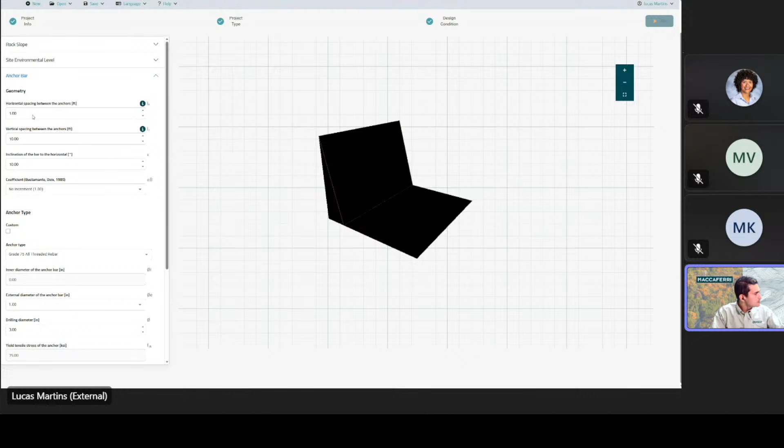For example here, you can see that the mesh is being underutilized because we chose a very strong material - Rock Mesh 3030 or Mac Armor 3030, pretty much our strongest material. As you go here in anchor bar, we can then try to increase this anchor spacing. Let's try to increase to 13 by 13 feet and run that, so you can see you can do different iterations to better utilize the mesh.

You can see after we enter that, now the anchor is failing, so we might have to increase the diameter of that bar to grab a stronger bar. You can play with the different elements and achieve different results for the same slope. Again, anchor spacing is very important here because drilling costs a lot of money, so if you can increase your anchor spacing, you can reduce a lot of drilling and reduce a lot of money by using a stronger and stiffer mesh.

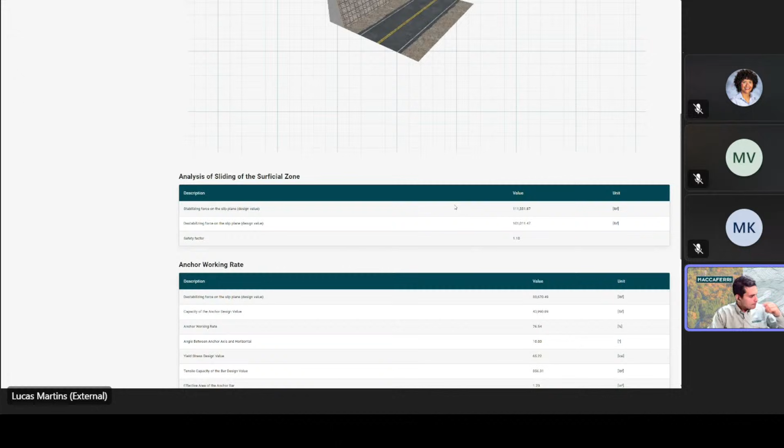On the result, you're going to see here that there is the force on that slip plane, and you have the stabilizing forces versus the destabilizing forces, or acting forces versus resisting forces. Here is the anchor safety factor calculation. You do have a minimum length of the anchor calculation, so that would be your anchor embedment - that is calculated here for you.

This is also calculated on the simple drapery, I didn't point out but it also calculated. And on the mesh design, a cool thing here that I wanted to point out is you have your nominal displacement calculated. So if you think about it, as you're testing those meshes, you have that stiffness curve - as you load it, the amount of elongation that it's going to respond with.

Considering the force here being the punch resistance of the mesh, the punch force acting - so the 10 kips of force acting on that mesh, you expect a 3-foot elongation on the center of that anchor spacing. So this here is a key result if you're placing your pin mesh very close to your protecting structure. If you have a building that's very close to your pin mesh and you don't want to allow that elongation to affect that structure, here's where that parameter would come from.

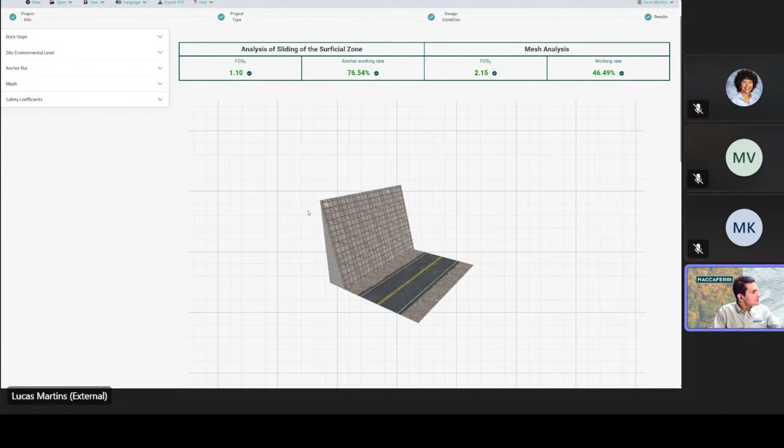So once you print out, you can go ahead and export the PDF. I'll open here and it shows you it's very similar to the other one, but with different results.

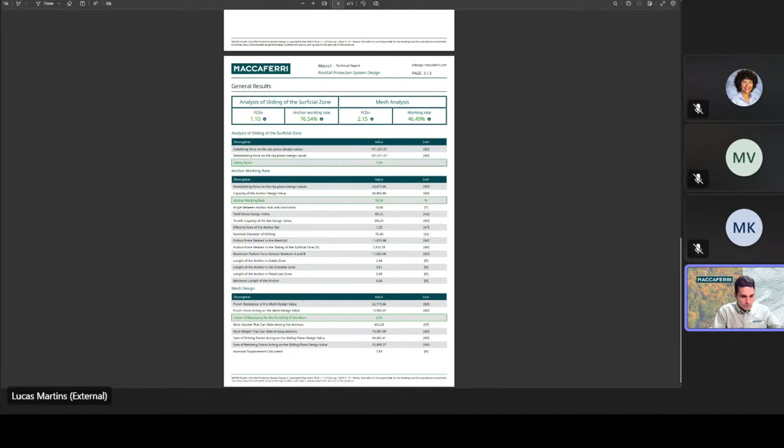Okay, and with that, it concludes our presentation today. Just under an hour - that's great.

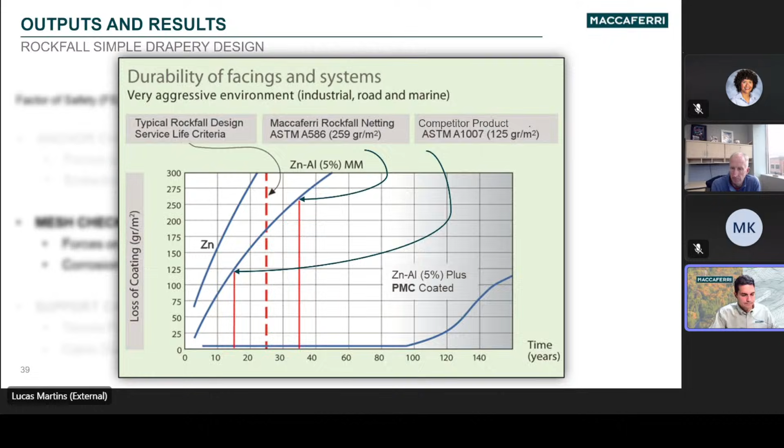Lucas, we have a couple more questions here. That was a good answer on the lifespan and corrosion aspects there. This next question is a little more on the technical side.

Give an example of what is the suggested pressure of the debris on the elongation mesh, in units per square inch or cubic foot, on the rock slope and on a soil slope - or making a comparison between when you're looking at this on a rock slope versus a soil slope.

Let me try to understand the question here. So it's comparing what kind of load requirement from a rock slope to a soil slope, if that's what I think it might be. The question asks about it in terms of pressure, right? Yeah, but maybe just start with rock and soil and go from there.

You definitely for soil slopes using wire mesh, usually you're talking of slopes up to 70 degrees and a shallower thickness of instability. Whenever you're talking about a rock slope, you're expecting a lot higher pressures into your mesh than a soil slope. There are other important parameters on the mesh for soil slopes, but we definitely see a larger requirement of punch strength or pressure for the rock slopes than for the soil slopes.